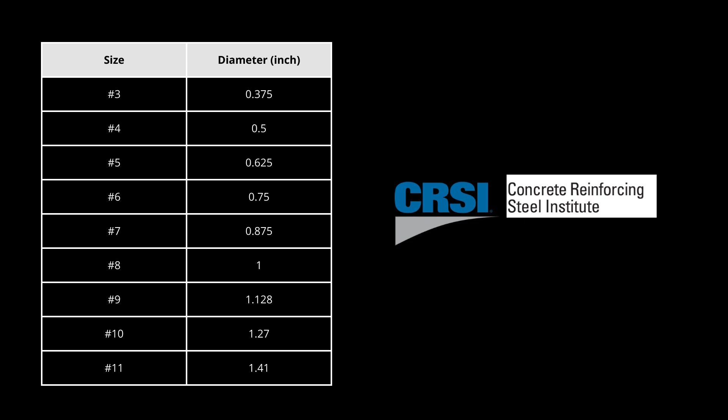Learn Concrete Estimating, Lesson 2, Calculating Weight of Rebar. Part 1, Rebar Properties. As per Concrete Reinforcing Steel Institute, given rebar sizes are number 3 to number 11 for common structures. On this table, all we need to remember is the diameter of number 8 rebar. Number 8 rebar is 1 inch diameter.

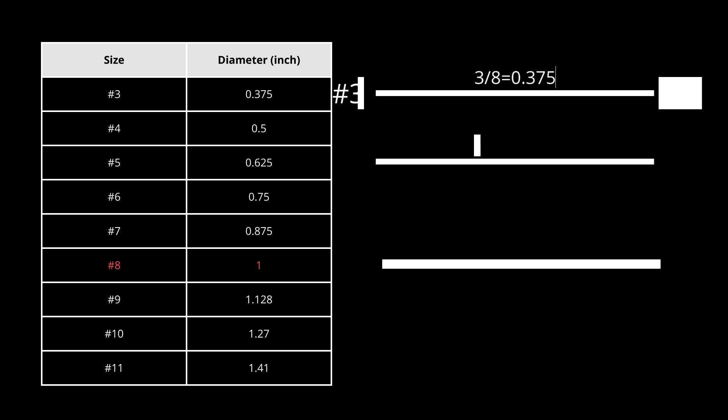Diameter for other rebar sizes are fractions of number 8 rebar, such as size of number 5 rebar is 5/8 inch, size of number 3 rebar is 3/8 inch. Just divide rebar size by 8. As you can imagine, number 3 is the lightest size and number 11 is the heaviest size.

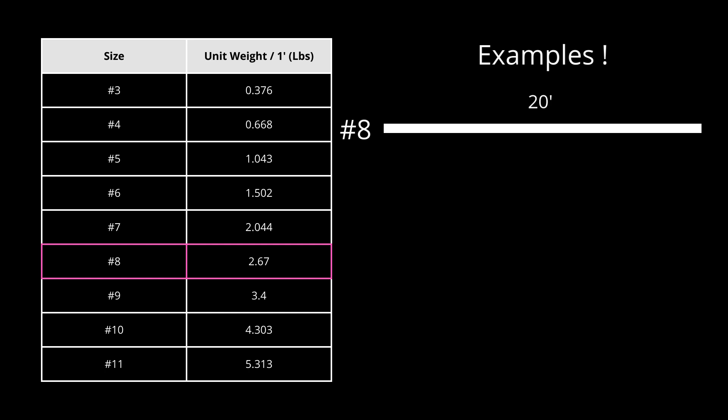As per CRSI, Concrete Reinforcing Steel Institute, each rebar size has its own standard unit weight. In this table, you can find unit weights for all rebar sizes. Unit weight is weight of 1 foot rebar. How many pounds is the weight of a 20-foot long number 8 size rebar?

Since we know the weight of 1 foot of number 8 rebar is 2.67 pounds, we can figure the weight of 20 feet length. 20 feet times 2.67 pounds equals 53.4 pounds. The same way, we can figure the weight of a 30-foot long number 5 size rebar. Weight of 1 foot number 5 rebar is 1.043 pounds, so 30 times 1.043 equals 31.29 pounds.

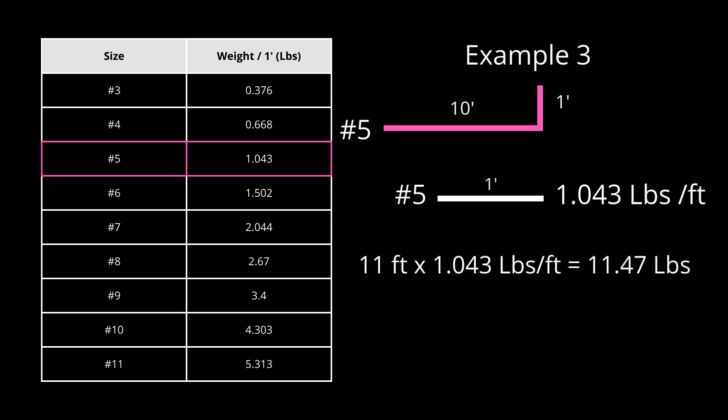Rebar may have different shapes, L shape, Z shape, or any other shape. We just need to find out total length. In this case, total length is 11 feet, so 11 times the unit weight of number 5, 1.043 pounds, equals 11.47 pounds. Rebar mills can produce up to 60-foot long rebar.

U.S. rebar suppliers sell rebar with 20-foot, 30-foot, 40-foot, and 60-foot length. For estimating purposes, we will use 20-foot long rebar for residential and small-size jobs and 30-foot long rebar for mid and large-size jobs. In this example, we will use 30-foot stock length. That means we are buying rebar in 30-foot long pieces.

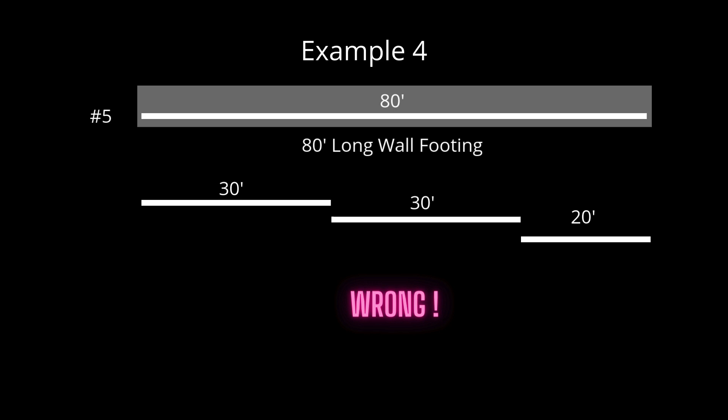Let's say we need to estimate rebar for an 80-foot long wall footing. We will need approximately 80 feet of rebar, but we only have 30-foot long pieces. So we will have to add 30-foot pieces together to make 80 feet. But we cannot add 30-foot pieces tip to tip. As per ACI, American Concrete Institute, we have to overlap rebars to keep structural stability. We need to overlap rebar.